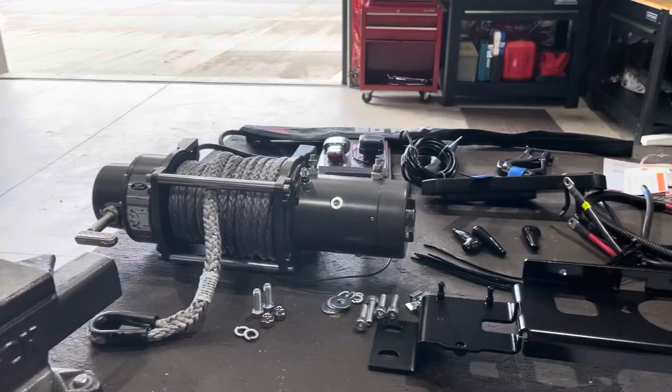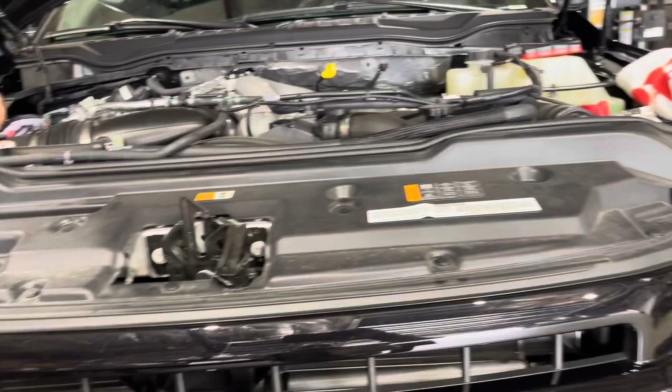Okay, today's the day we install the Warn winch on my Super Duty. So we got parts all ready, everything's unpackaged. We're working on getting the airbox out. Batteries disconnected, both of them, and then we're gonna pull this bumper up, get this truck in the air, get this bumper off.

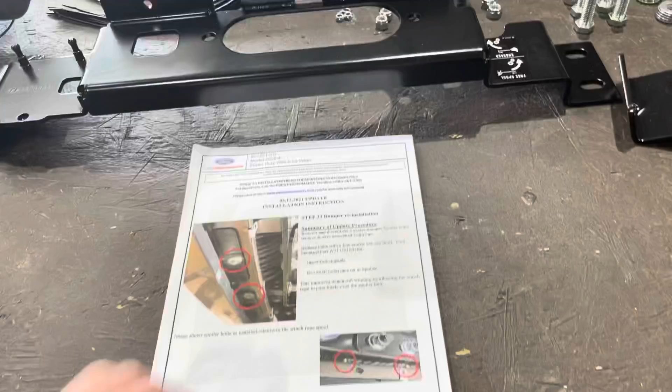First things first, when you buy this, it does not come with a manual, and you have to go download it off of Ford's site. It tells you exactly where to go. I think it's 58 pages long, something like that.

But there's some updated procedure stuff, some issues with the synthetic line hitting on the air dam below the bumper. These screws need to come out, but there's some updated stuff.

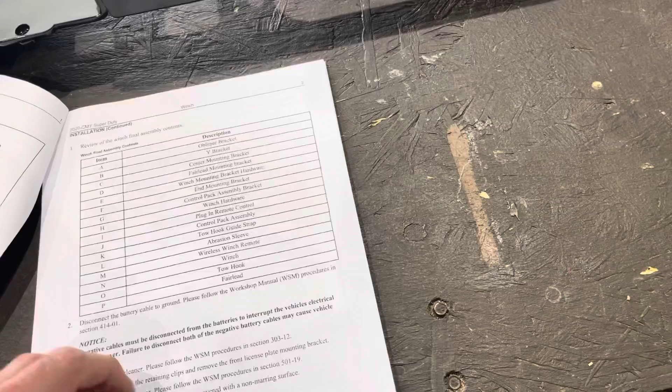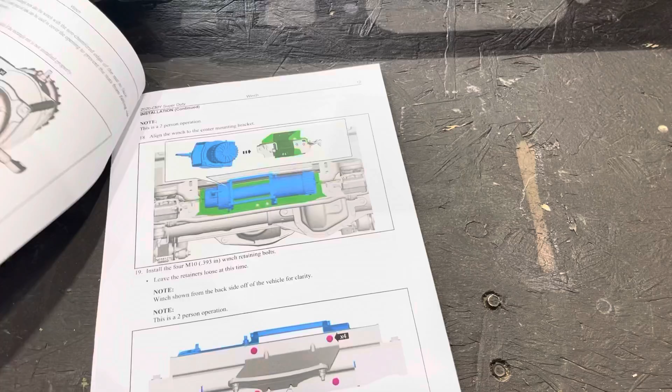And then I'll tell you, these instructions are very detailed. Great 3D CAD renderings, so you're not going to have an issue knowing what to do, at least I don't think so. And if you do, then you probably shouldn't be installing it yourself. But we'll judge that later after we get this done and see how well and easy it is.

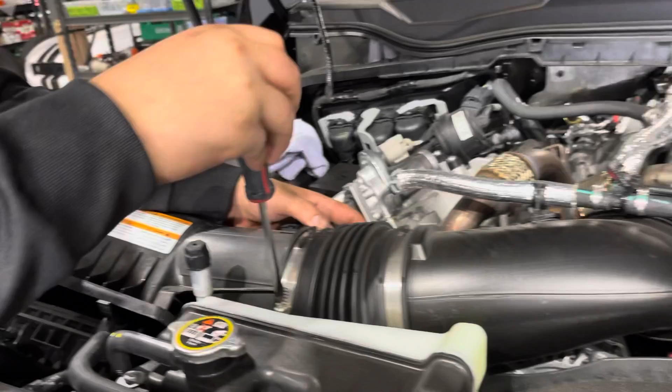Let's get going. Right now we're pulling the airbox off the top. We're going to disconnect the MAF sensor, just pull that thing off real quick, and then pull the actual airbox down here off. That's, I believe, going to give us a route to install the wire harness for the winch.

So we're going to get to it right now. If you need instruction on how to do that, Ford has all sorts of stuff in YouTube videos, but we're just going to get this thing done and move from there.

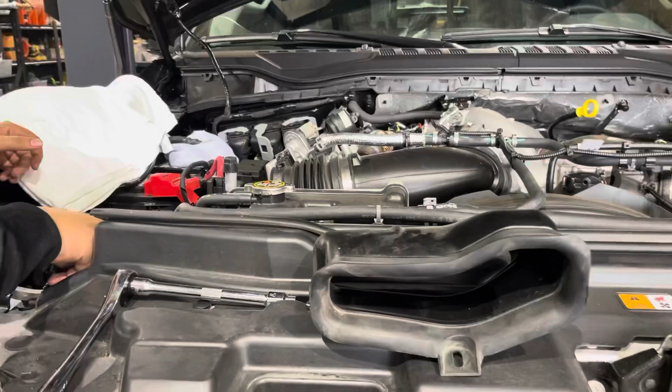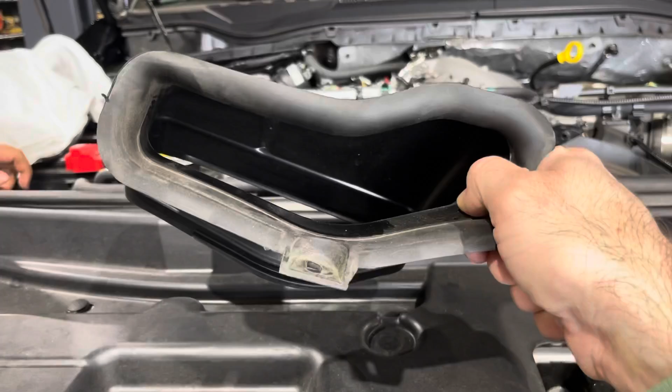All right, we're getting this airbox out. Just a quick reminder, make sure you have a 3/8 hex, that's how you get that box out. And then a little clip, pull out the air intake to the airbox. And then you got a little 7mm back there, and we should be able to pull it right up.

So if you don't want to follow the instructions that Ford gives you, we're not. We're just pulling the dang thing off. Quick and easy, that's how it comes out.

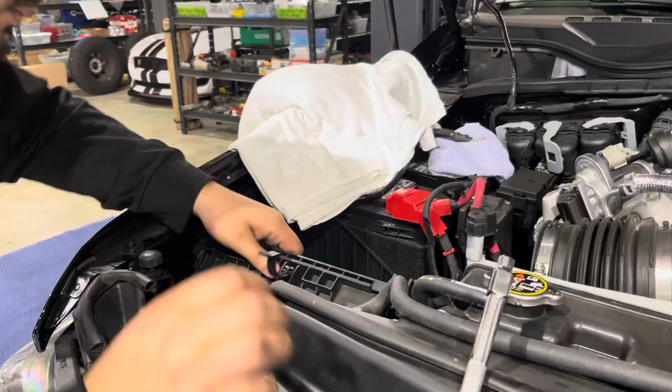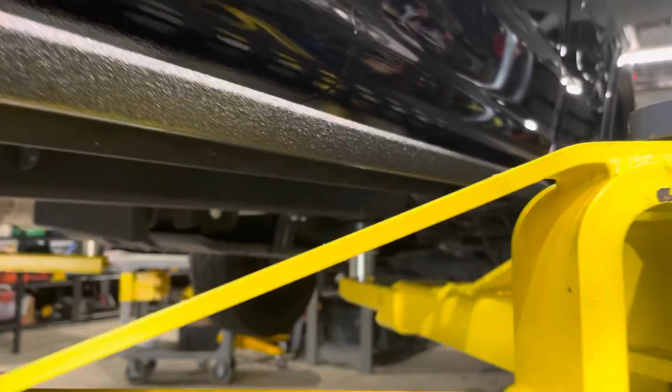Lift's a little off, I gotta adjust that. But it's going up, make it nice to work under the truck. Pull that bumper off, probably right about there.

Alright, rested on the supports, we are ready to rock. Okay, truck's in the air, let's pull this bumper off. Again, it'll show you right here in the manual.

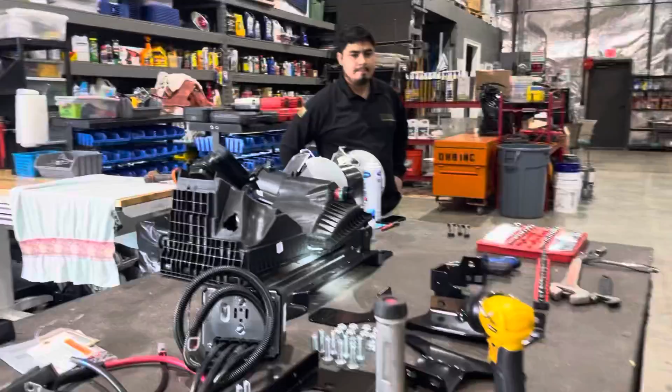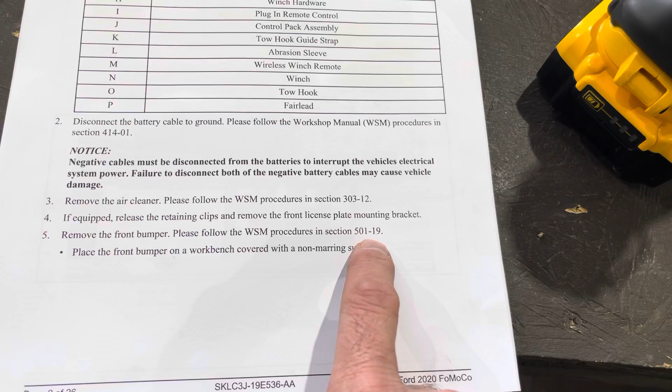Ford tells you to follow WSM procedures in section 501-19. I think we're just gonna pull the darn thing off.

Alright, we pulled the front plastic fascia off. Just a clip here and a clip here. This whole thing, just keep it all together. Don't try to—it's 3 pieces, but do that and you just got a couple of your little...

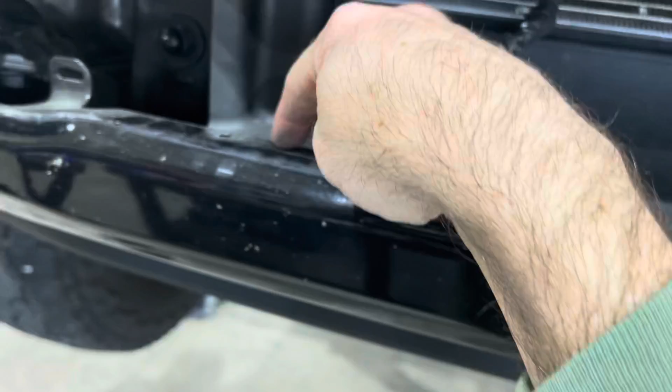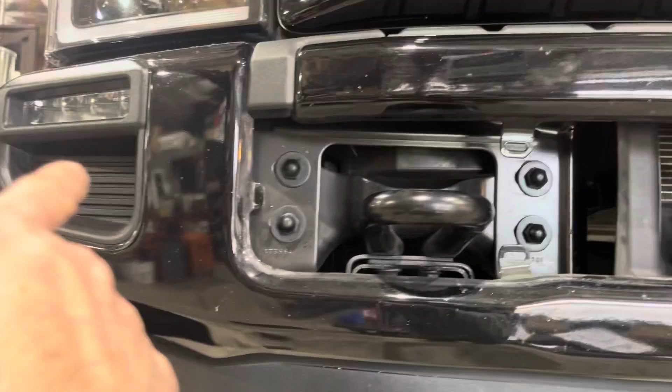Christmas tree clips, I think there's 4 that pop out there, and then your split bolts, plastic split bolts up here, whatever they're called, I don't know. Pull those things out, 8 total. Pop that side with your plastic trim tool, that side with the plastic trim tool comes right out. Those 8, 4 and 4 each side, those will come off.

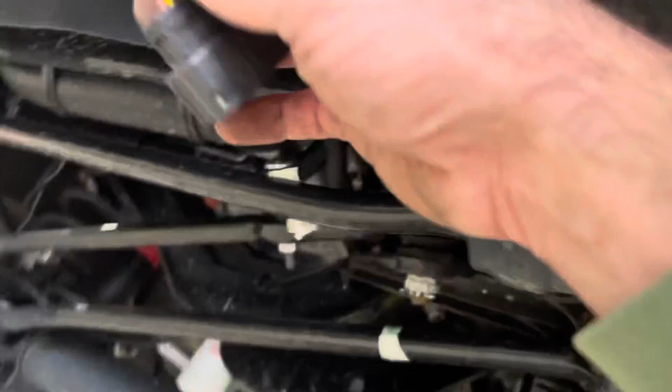And then on the crash bar on the inside, these 2, one there, come off. And disconnect your light harness. Oh, that's for your LEDs and all the other goodies. I do have an engine block heater, but we're gonna pull this bumper off first, get it supported, pull it off a little bit, and go from there.

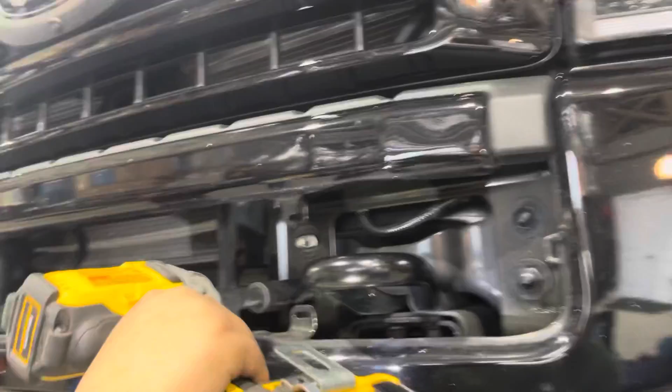18mm seems to be the socket that works the best to pull this sucker off.

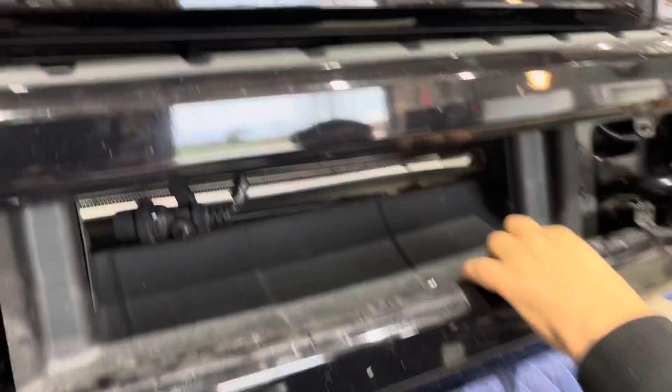So, all right, we got the bumper basically unbolted, in place, sitting on a transmission jack. Put some 2x4s under and a pad to hold it in place. You know, there's different ways to do that, but that's how we're doing it.

Make sure you undo these little rubber tabs here on this rubber air dam between the bumper and the body. And then also, I have a block heater, I'm going to work on that second, but you got both sides. We're going to do that one and go from there. Here's the engine block heater outlet.

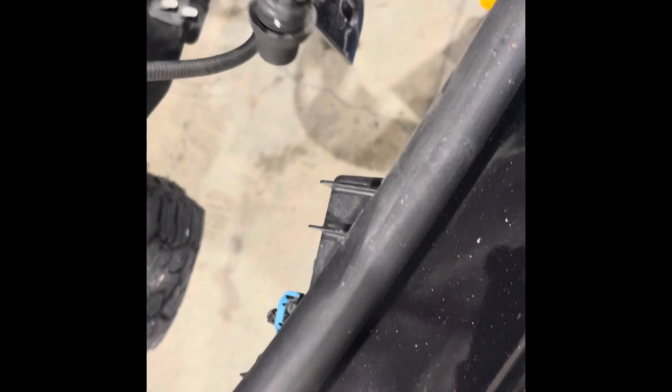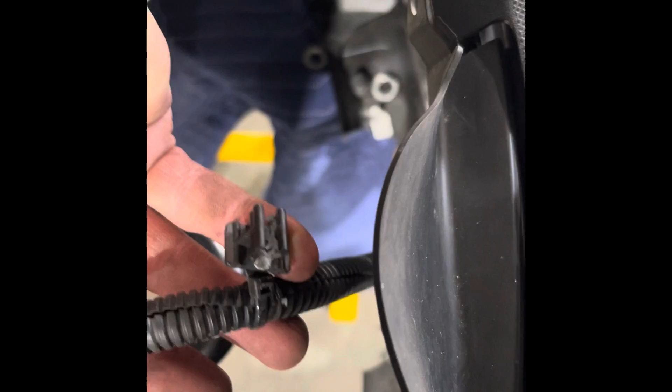It was clipped to the rubber air dam, and then also to the bumper with these little guys. A little screwdriver will save your life on this little Christmas tree clip. You got 2 of these little clips and a Christmas tree clip. Get those off, hang that sucker on the side. This bumper is free and ready to come off.

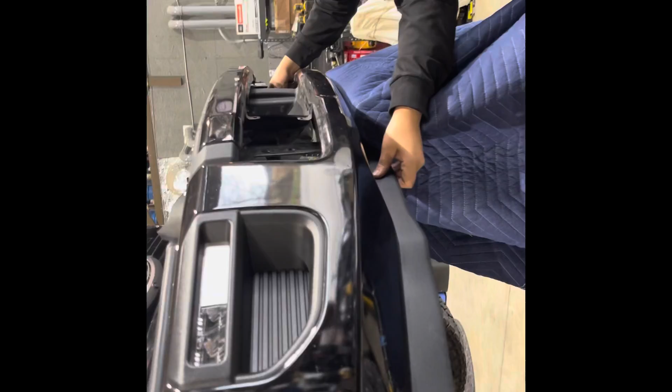How heavy is it, Ronnie? Not bad. This and that.

I don't have cruise control. I think it's adaptive cruise control. I don't have it on this truck, so we don't have to worry about that.

Let's get your wiring harness right here that is attached to this plastic shroud with those wedge clips or whatever you want to call them. So we're going to pull those off with a screwdriver.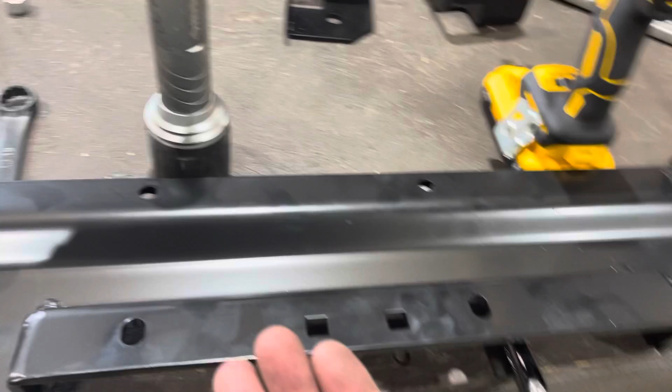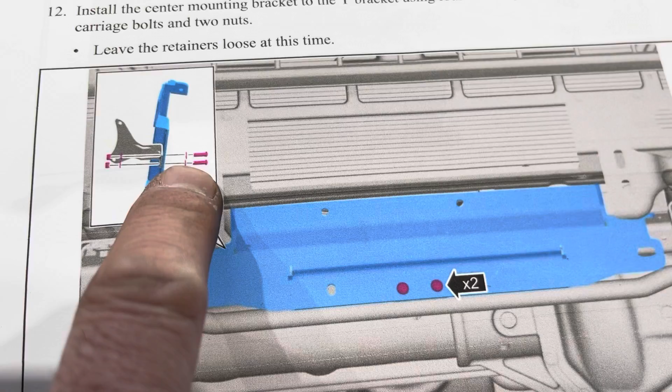All right, we're going to install the center bracket on. It says to use the carriage bolts, 2 nuts here, but it also came with 2 washers. And then you look at the instructions, it shows you putting a washer into a carriage, which don't think that's going to work out. So we're just going to use, it doesn't say anything about washers. We're going to put washer and nut on the back of the carriage bolt. All right, and it shows, make sure these are facing towards the front of the truck, the angle, and these are where the 2 carriage bolts go.

All right, now we're going to install these end mounting brackets. They look very similar. There's a little offset in these holes right here. So what I figured out is that weld goes far outside back. You could take this thing and flip it like this, but then the weld would be up here, and that is incorrect. You want the weld far in the back right here, and that's gonna bolt into the frame and 2 points of the center bracket.

All right, now you just torque these suckers to 75 foot-pounds per the instructions. You do the first 3 right here, then we'll install that and we'll torque that down as well.

Okay, we're throwing these 1/2 inch nut bolt washer kit in there, and you're gonna wanna run this bad boy down to 50 foot-pounds. Ford tech spec calls for 50 foot-pounds on those 2 bad boys. We're gonna knock that out real quick.

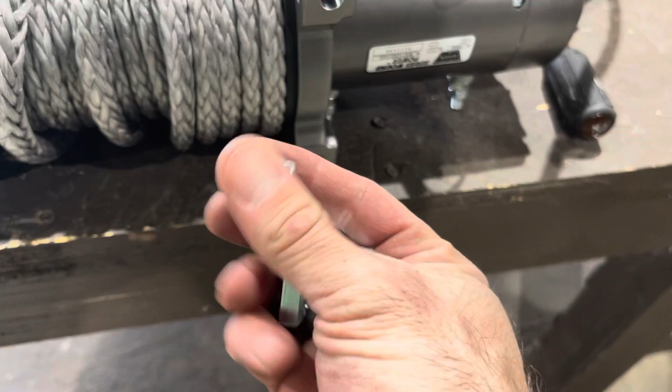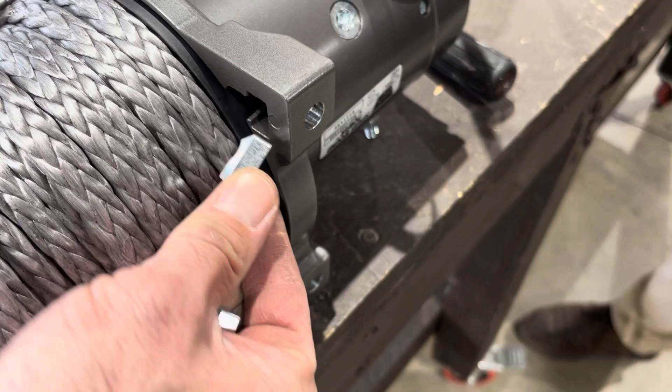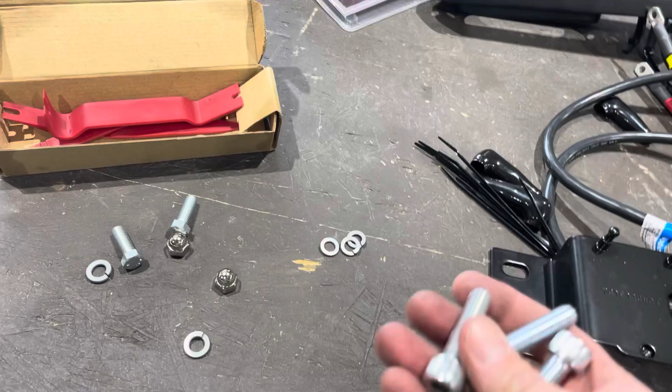All right, we're gonna use these winch retaining bolts here. Get these installed. It says to just install the 4 of them, but I got 4 washers, 4 lock washers as well. I'm throwing them on. If I need to pull them off at the end, I could reach back there and do it, but I have nowhere else I could see where they go.

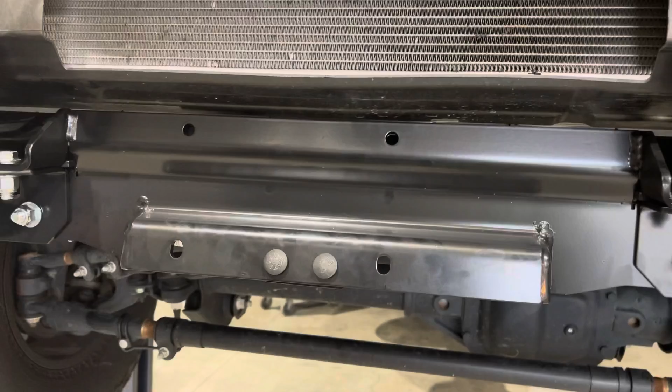We're gonna go by, Ronnie's gonna hold it up, I'm gonna go behind, get these things in loose and go from there.

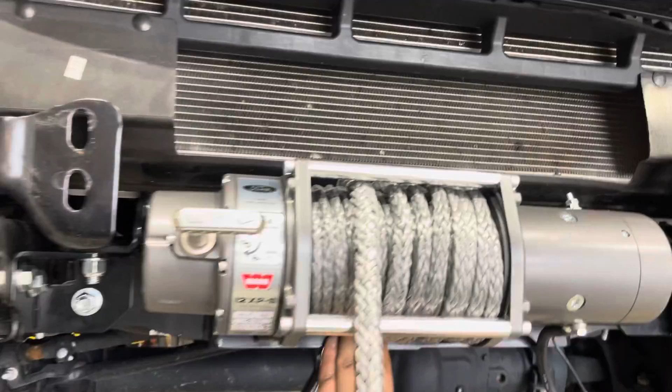Okay, we're going with the carriage bolts, we're going to put those at 50 as well, 50 foot-pounds. We've left the winch loose, hand tight, but it's threaded on good. Remove the tape so it's all ready to be cinched down when we're done, and we're going to torque these down to 50 foot-pounds.

All right, now that I got my hand back, appreciate it, we're going to torque this sucker down to 30 foot-pounds.

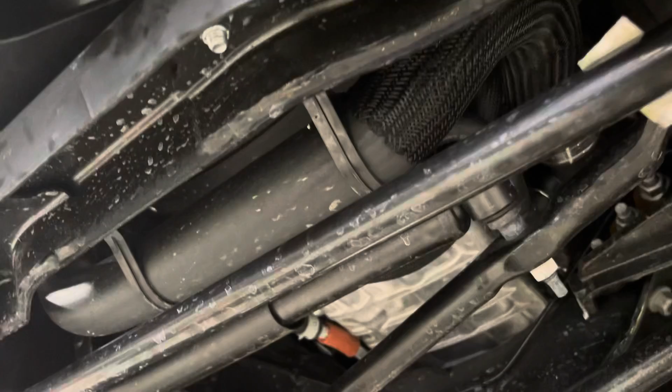Ronnie's just giving me a little payback. All right, go for it Ronnie. Up, ready? All right, yep.

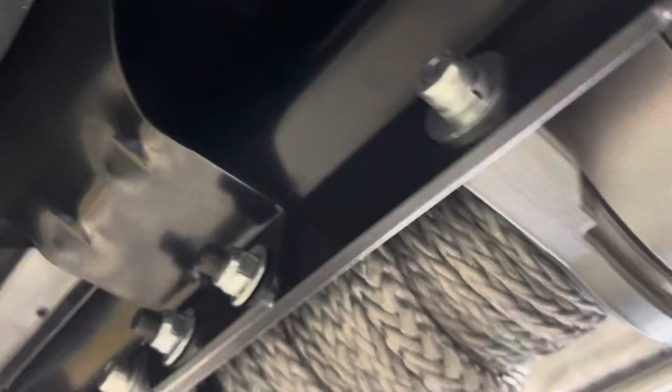Now those 4 M10s right here, go ahead and torque those down to 45 foot-pounds. We're ready to move on.

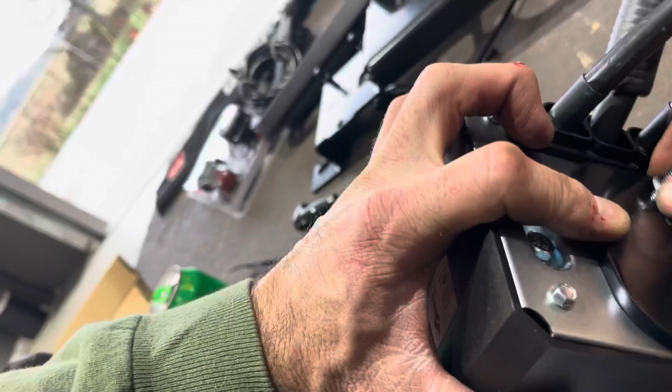Assemble the winch control pack assembly to the winch control pack assembly bracket, something like that, right there. It comes with 2 M6 nuts and some washers, and we're good to go.

All right, protective boots are on, the wiring harness, and we're going to torque this down to 85 inch-pounds, or 85 pound-inches. So we've got to get the small guy out and knock this thing out.

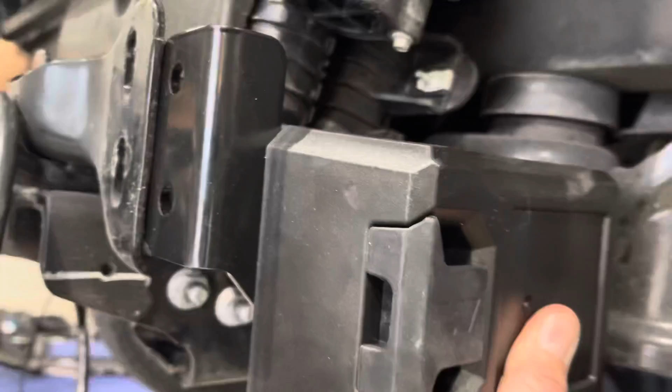We got these things torqued down, and we're running them behind the bumper bracket right here, and that's where the control pack sits. I'm assuming it's going to go somewhere right there. Haven't gotten there yet, but we will get there eventually.

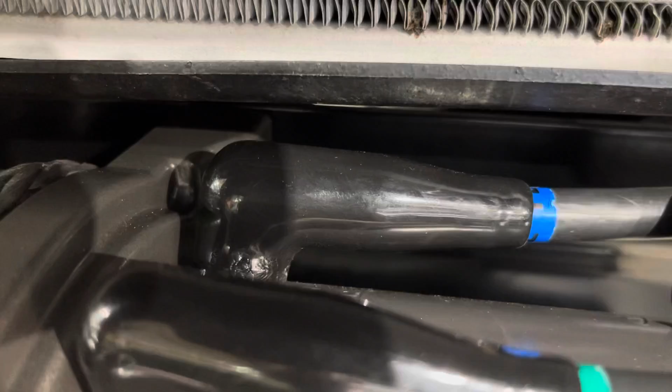All right, getting these boots all the way on is ideal. You don't want them caught up, you want them slipping all the way down. You can see we struggled putting these on, they're tight, hard to get back on over.

You may want to install the wiring harness before you put the winch on to get these on nice and tight. It took about 5 minutes with the needle nose, pulling it and getting it slipped in. So just a little word of advice, it's kind of a pain in the butt.

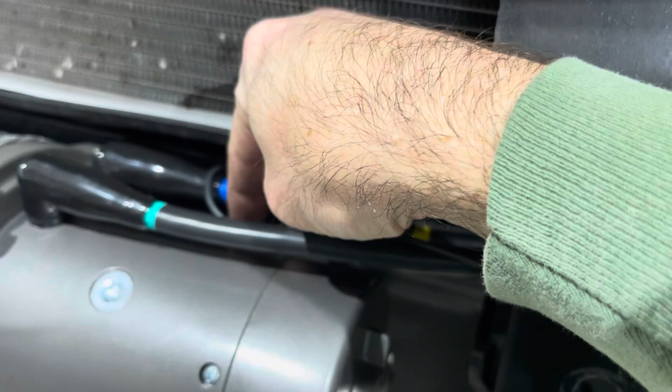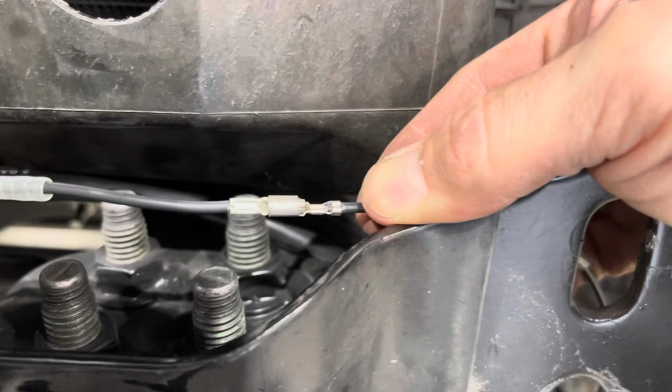Route your 18 gauge ground wire around the back side, in between green and blue, run it across. It's going to go sit inside. Pull the 2 waterproofing seals off, and then use some needle nose and get that thing in there real good. Then we'll reinstall these.

All right, time to route negative and positive wires off the winch and the module. Negative is going to run right in between that bracket that we installed and the frame, go right under to the other side. Your positive, which is wrapped in the tubing, same direction, right through here, under there.

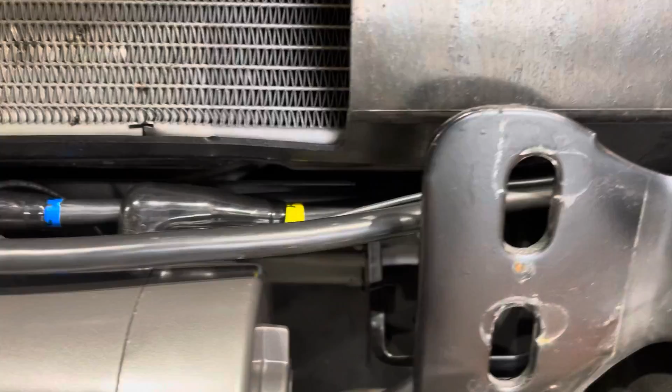Now we're going to go there. Okay, there's the other side right there. So right under the cross member, under the radiator, positive, negative, boom, run up, and you can see I'm shining the light right on it, right there.

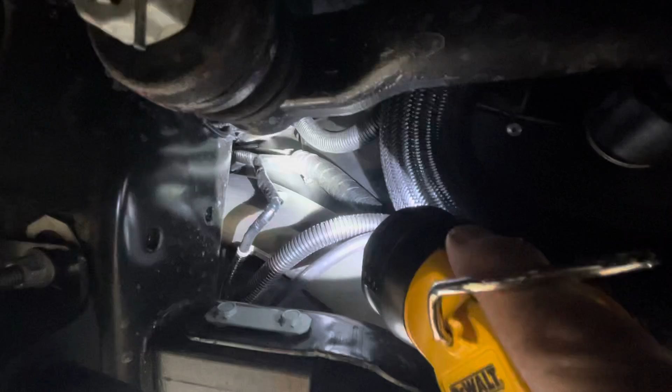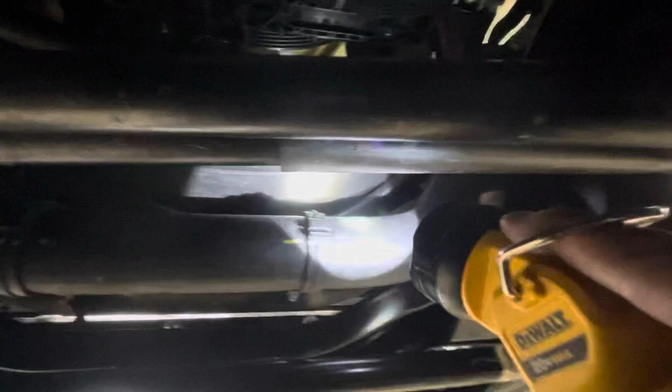That is the radiator wiring harness. That is where you're going to run and connect a zip tie to. Hard to see, you can barely see it right there. Connect a zip tie there, and we ran this sucker all the way under there, and we're going to zip tie it.

It goes right up that wiring harness, just follow it all the way up. And then right where you disconnected the airbox, that funky little wedge bracket, you're going to make a turn, and we're going to run it right to the battery.

From there, we'll raise this—well, I'm sorry, we already lowered the truck—but we'll go ahead and hook that up to the battery now.

Okay, top side, here's our 2 cables right here. And you can see, we're going to come up, we're going to turn, and we're going to run this thing right up and around, and connect positive to positive, negative to negative over there.

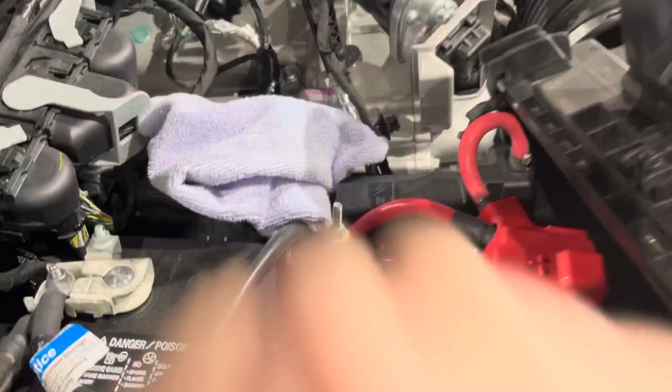And go from there. Okay, we ended up routing the cables on that AC line right under it, boom, right up in between these 2 electrical boxes, came up, hooked the negative terminal on right there. You can see this is the winch cable, and then also hooked the positive up right there. I just cut that off to make it fit.

Factory fit and finish, baby. There we go. All right, airbox is going in.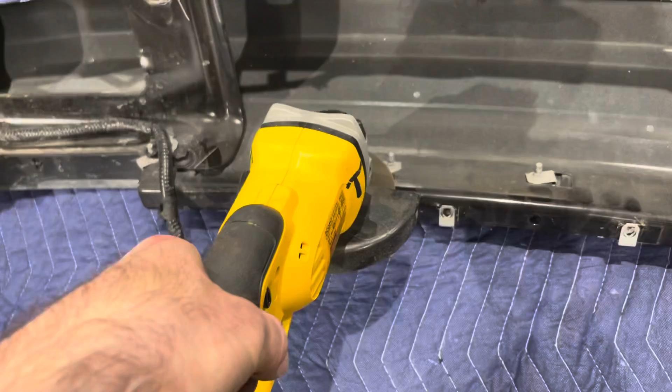All right, just zip these things off. Little 4.5-inch angle grinder, zip them off, smooth them out. There you go, quick easy fix. Should be good. All right, get the bumper back on.

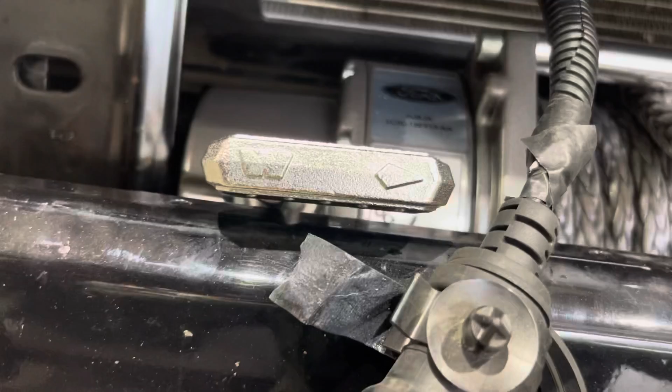We gotta lift this sucker a lot more, but that's where it is. Right there, bro. Okay, that helping? Yeah. Just notice that the free-spool lever is gonna be darn close to the bumper. That's normal, okay, the bottom part.

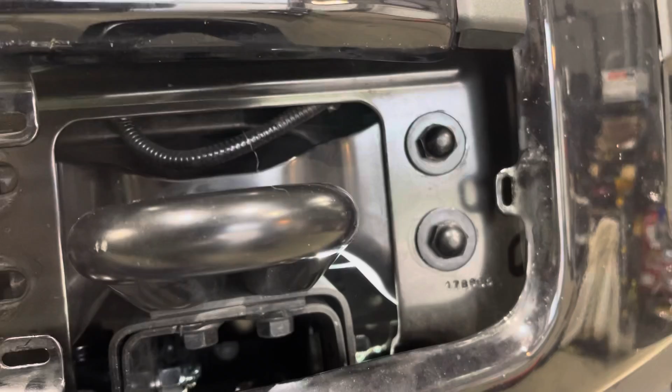We're gonna install the two outer sets of bolts there. The inner ones on the inner, based on the frame and the tow hook, are gonna be later. All right, we did end up installing the crash bar bolts loose as well.

Now we're gonna position this thing. We're gonna keep in mind to look at how flush it is on each side here, side to side, get it just right. Push that sucker up and hope it looks good. Right, and that's how it works. Okay, get that bumper on.

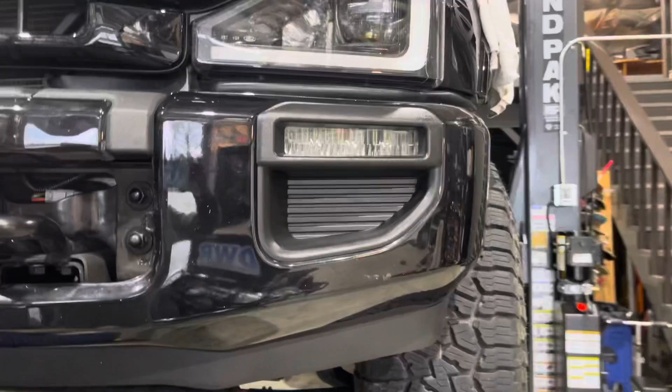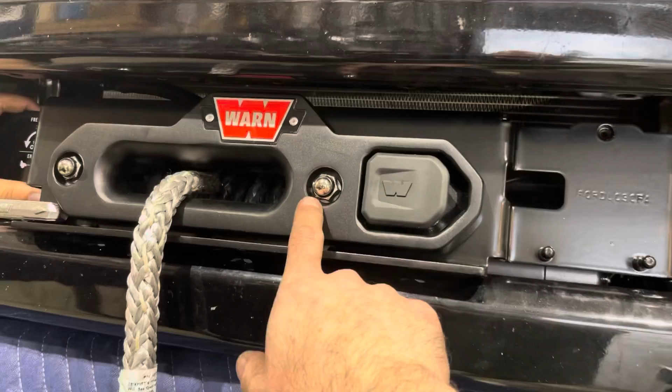Like I said, we got the outers on. We torqued that down to 75 foot-pounds. And we assembled this guy down, straightforward, just two nuts and bolts and a lock nut. Put that on, feed the wire rope through.

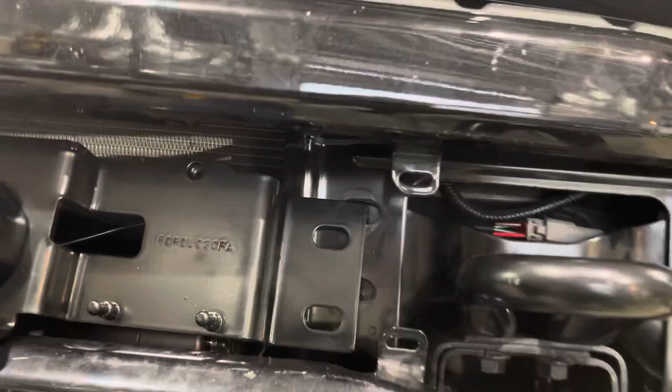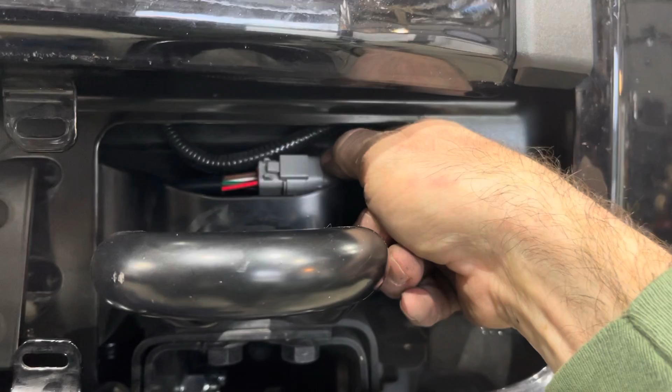You're gonna connect the remote here. It's got a small cable, and then when you put that bumper up, make sure to put the control module, the remote hookup, right here in this little cubby right behind the tow hook. That's where you want to connect that thing. There's no other way to do it. So make sure you do that. That was a tough one.

Besides that, you want to make sure your bumper's aligned. I think mine's off like a 1/16 of an inch. It's tough, but I'm calling it good. But yeah, here we go to the next step.

All right, install the inner bolts to the bumper there. Nice and easy, everything's easy on this. Shoot, how long has it taken us so far? 4 hours? About 4 hours.

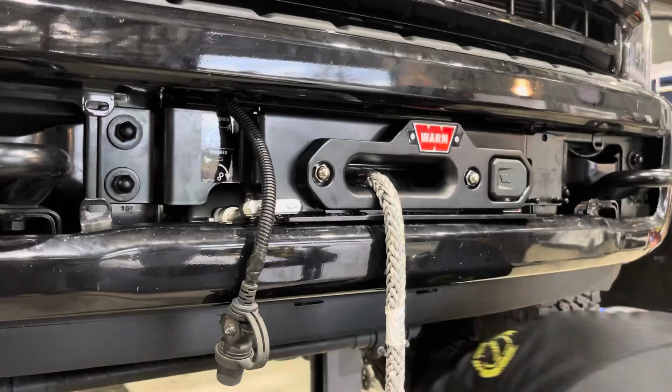We're about done, put the plastics on. We're getting there. All right, last little thing here, torque those things down, Ronnie.

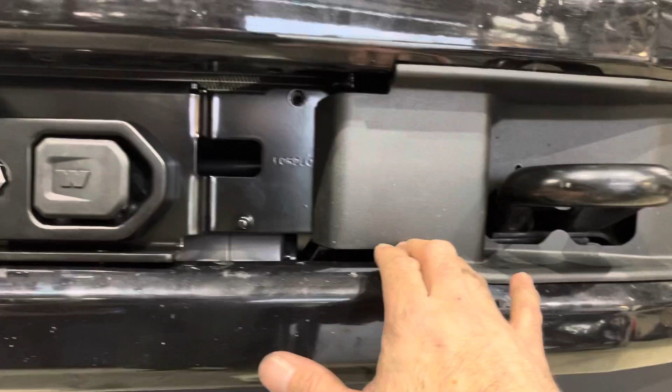We're getting there. After you get everything tightened on, you do not use the center shroud. That goes, it will not fit. It's too tight down here, and even if you drop the bumper, it'd be too low. So all the pictures I've seen from Ford, they remove it. You can see this piece gets removed. This snaps in. Ford does make an aftermarket piece that will cover this whole section. Probably end up getting that someday. But these just snap right back on.

Move on. All right, here's the finished product. Bumper's on, looks good all around. Fender up real nice.

Got her in, I'm gonna have a little too tight here, but that's it. Like I said, they make a filler piece for this. And I guess we'll come all the way over to here. This side's good to go.

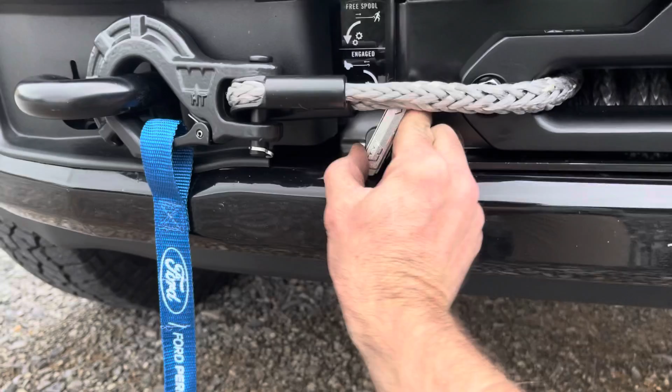Yeah, I definitely can't free spool. Well, you can. There you go. No, I'll do that later.

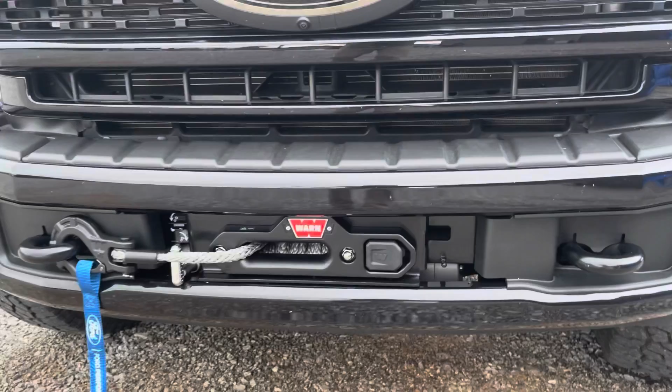But here we go. We have a 12,000-pound winch on this beast. I'm gonna put this to use. I have some new adventures coming in. I got some big land that I can play on from here on out. So there's gonna be some great adventures in this truck, and this winch is gonna be able to be the good utility truck to have out in that area.